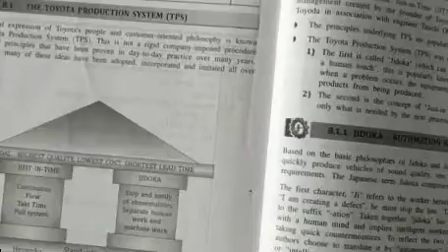Toyota Production System is based on two concepts. The first is Jidoka, and the second is JIT, that is, Just In Time.

Now, what is Jidoka? The Jidoka model or Jidoka concept is always described in one line: automation with a human touch.

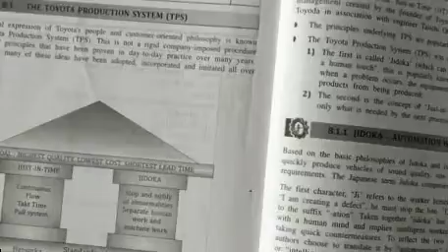When a problem occurs within the system, all the equipment stops immediately, preventing the defective product from being produced. So, when a problem occurs, all equipment stops automatically and immediately, which prevents defective products from being produced. That is the concept of Jidoka.

Now, Just In Time, the second concept, JIT. So each process produces only what is needed by the next process. This is JIT - each process produces only the material actually needed by the next process. That is Just In Time production, JIT production.

According to Toyota, this is automation with a human mind, and it implies intelligent workers and machines that identify errors and take quick countermeasures. That is the usefulness of Jidoka and JIT.

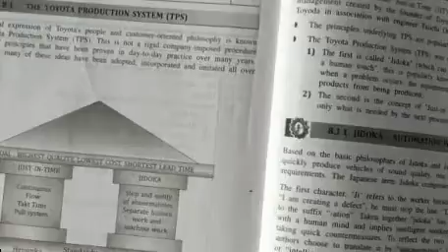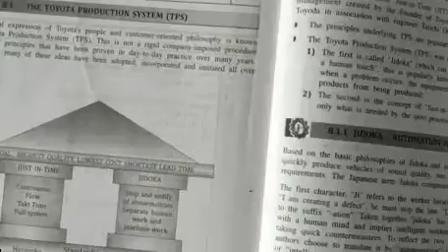So if we talk about the usefulness of Jidoka or JIT, according to Toyota, it is automation with a human mind. This implies intelligent workers and machines that identify any type of error and take the necessary countermeasures immediately. That is the usefulness of Jidoka and JIT.

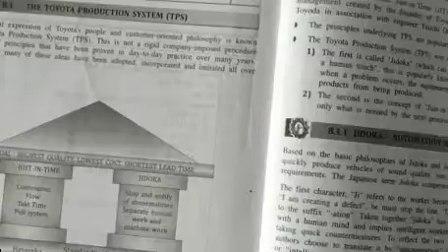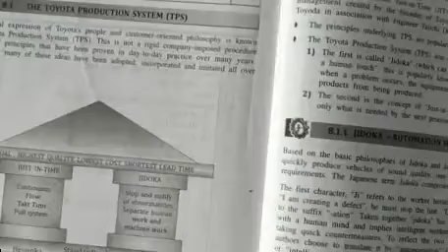Now, Just In Time actually replaces the conventional push system with a pull system. So JIT replaces the conventional push system with a pull system.

Now what is a push system? In a push system, production is pushed through in batches. For example, the supply of raw material goes to casting, then to machining, then to assembly works. After assembling, it goes to testing, and after testing, the final product is ready to deliver to customers. This process is generally known as the push system.

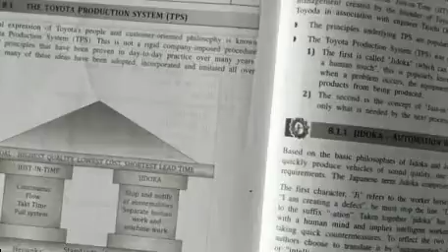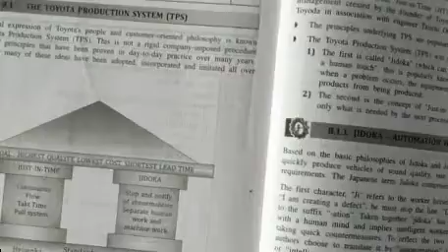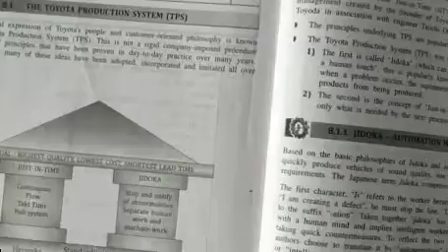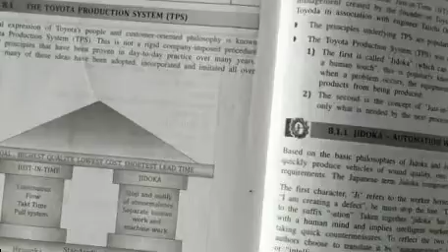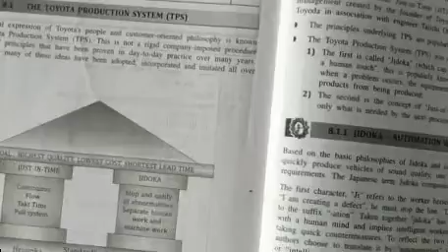In a push system, production is pushed through in batches. So what is the actual difference? A push system first makes the product and then finds a customer for it. A pull system is the reverse - it creates a customer first and then makes the material. That is the difference between the push system and pull system.

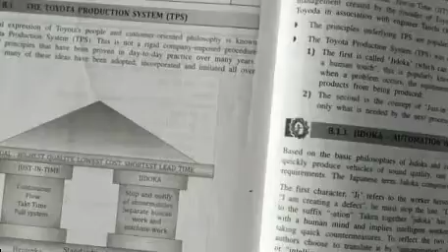Now, a push system makes all that it can, while a pull system makes what is needed, when it is needed, and in the amount needed.

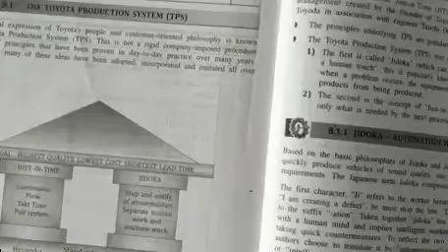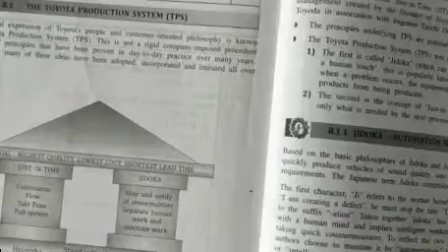Now pull systems always have the power to clear a number of wastages and difficulties, which are cleared by a pull system. So pull system clears a number of wastages or difficulties. Okay, so what are those?

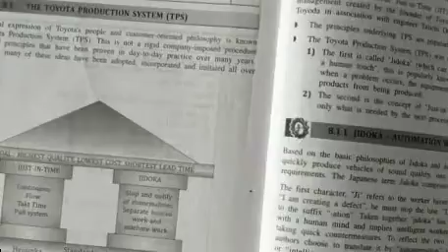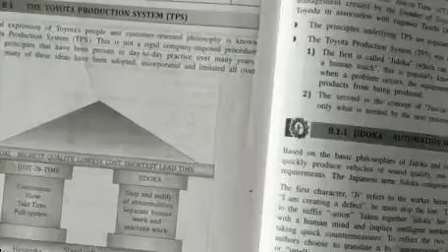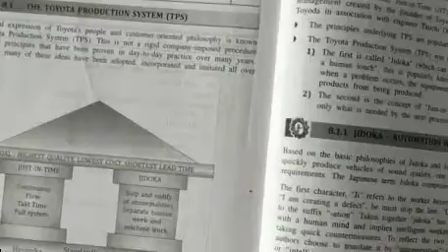Actually, the actual usage of all resources is the pull system. Achieving the production precision, the second point. Third is the low inventories at different stages. Fourthly, it is processing of small lots at a time. Then the fifth, significant reduction in wastage. And sixth, there is better communication among the functionaries, among all functionaries.

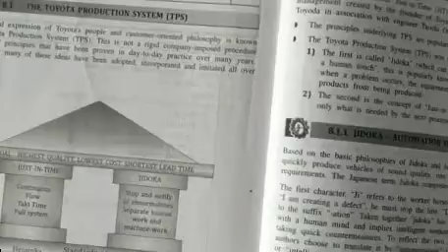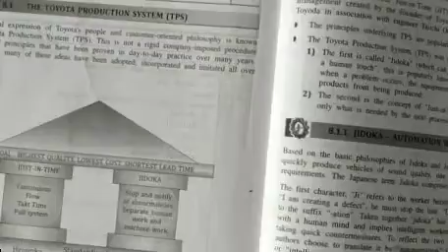So firstly, actual usage of all resources, which is very important - that is the full utilization of all resources. It is important. Secondly, there is achieving the production precision, which is also important, because if there is any problem with the design, if there is any problem with the pattern, if there is any problem with the quality of the product, then that will halt.

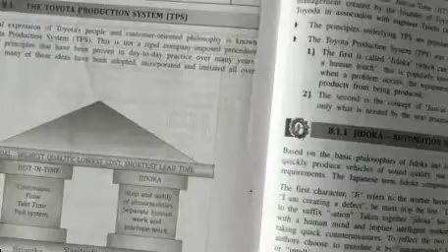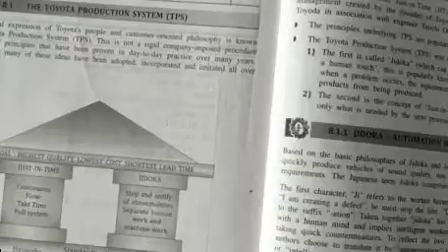Okay, so production precision means all these things are at their equal mark - that is the production precision. And low inventory means low inventory at different stages. It is a character of the pull system. Low inventory means everyone has to invest low in the inventory, and grossly if all the inventory is low, then there will be low investment on the raw materials and other tools, equipments, etc. So there is low inventory at different stages. It is also a point.

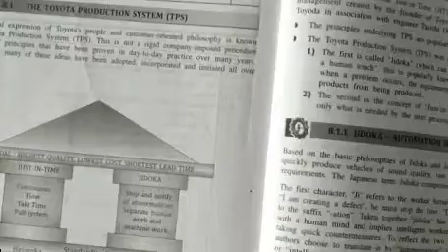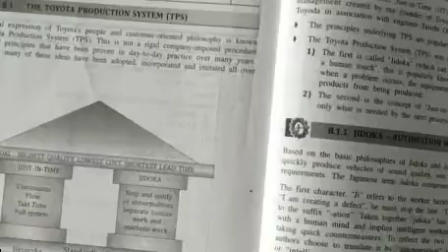Then processing of small lots at a time - when anyone can process a small lot at a time. And wastage, it is important in case of pull system. If you go through pull system, it has the power for significant reduction in the level of wastage. So wastage reduction means it is a cost saving, highly cost saving method to reduce your wastage.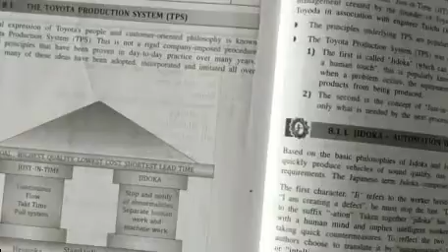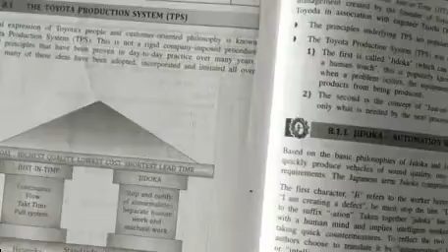Okay, and obviously you need a full-fledged system, so better communication is marked as a good characteristic in the pull system - that is better communication among all the functionaries who are involved in that production process or involved within the organization.

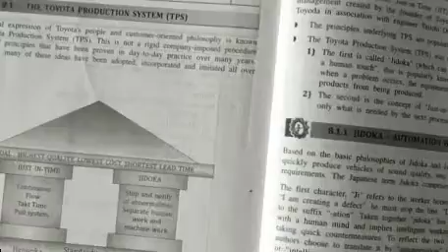Okay, now in the second procedure, now if we come to the second one, before we take another, we just get a term. There is a term normally used by Toyota Production System, TPS.

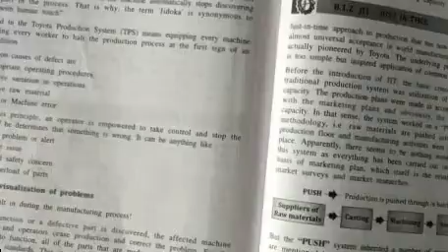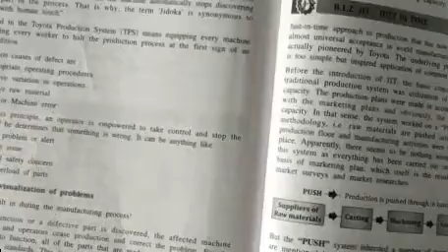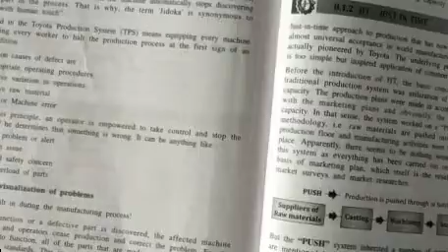This means actually equipping every machine and empowering every worker to halt the production process at the first sign of an abnormal condition. It is basically the main character of the TPS, the Toyota Production System - equipping every machine and empowering every worker to halt the production process at the first sign of an abnormal condition. Whenever it is abnormal, all the process will be stopped.

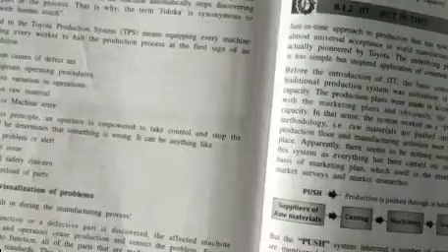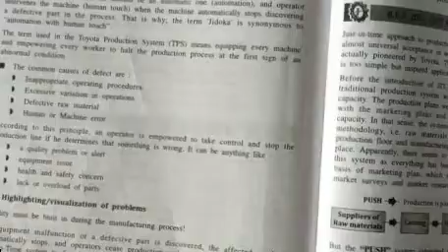Now, what are the common causes of defects? So when we are taking the common causes of defects, there is inappropriate operating procedures - that may be a major reason. There is excessive variation in the operation, that is also a major reason. Or there is any defect within the raw material, that is defective raw material, that is also a point. Or human error or machine error, that is also a point - there may be a human error, there may be a machine error.

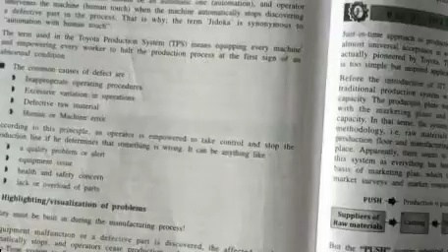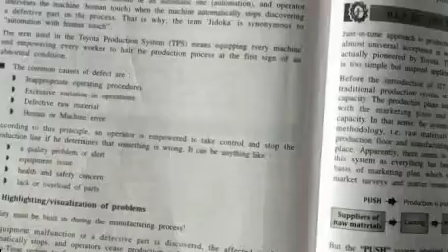Okay, so according to this principle, an operator is empowered to take control and stop the production line totally if he determines that something is going wrong. It can be anything like a quality problem or a quality alert, there may be an equipment issue, health and safety concern - there is also an issue - and lack or overload of any parts, that is also a problem within.

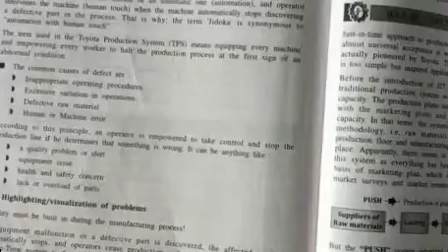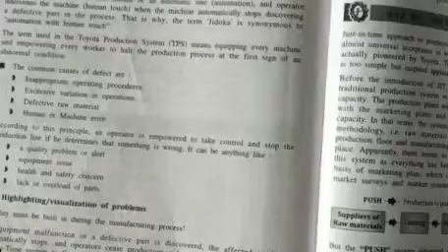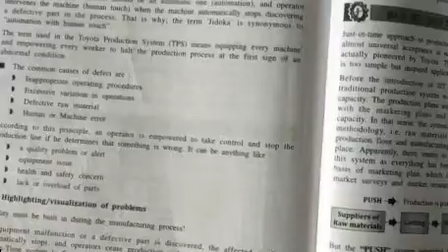Now come to the second process, which is known as Kanban. Kan means a card, and ban means a signal, so Kanban means a card signal. It is a signaling system employed in production management, which uses cards as a media for signaling or communicating messages.

We are talking about a pull system. So Kanban is a pull system.

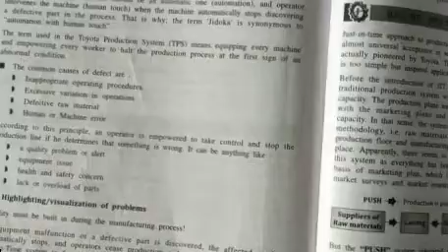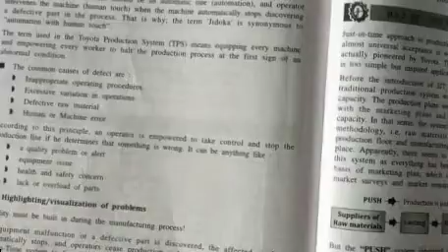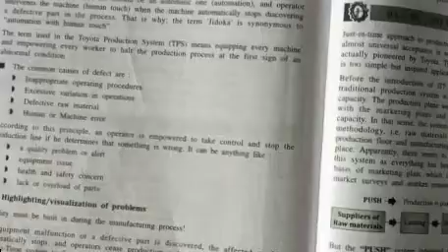If you see a Kanban card, there are several things within it: part description, part number, quantity, supplier, name of the planner, order date, due date, card number, location - all these things are within a Kanban card. These are the rooms within a Kanban card which are to be filled.

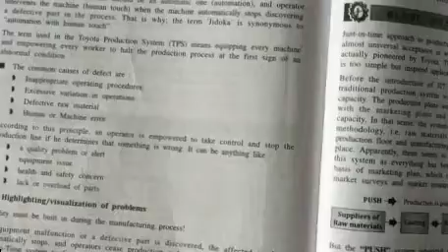Now the commonly available Kanban system is the 3-bin Kanban system. 3-bin Kanban means, just try to relate: first we have the initial demand point, that is the first point. The second pole is the inventory control point, and the third is the fresh supply of raw material.

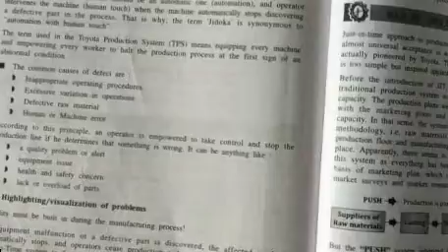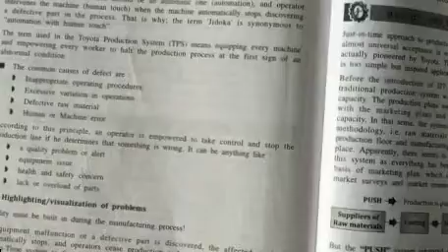These three things are interlinked or internally connected. First is the initial demand point, second is the inventory control point, and the third is the fresh supply of material. These three empty points are related through a Kanban card.

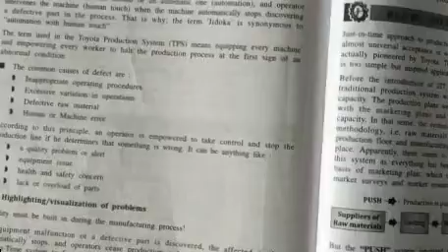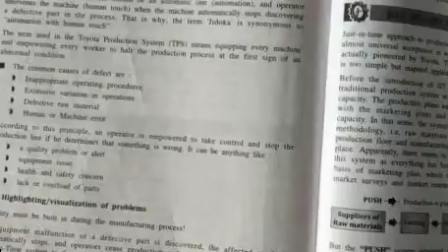There is a bin in the supplier premises. Similarly, there is a bin in the factory store, and there is a bin in the factory floor. So first there is a bin in the factory floor, secondly a bin in the factory store, and thirdly a bin in the supplier premises, from where the raw material or fresh supply of raw material comes.

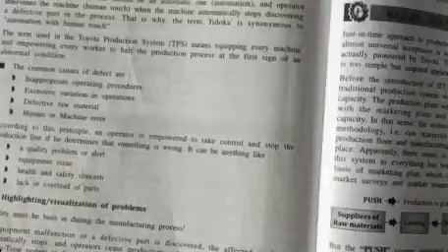These three bins are internally linked with a card, which is the Kanban process. So time to time, signal for the requirement of material we can get from the Kanban card. This pattern is what we call the 3-bin Kanban system.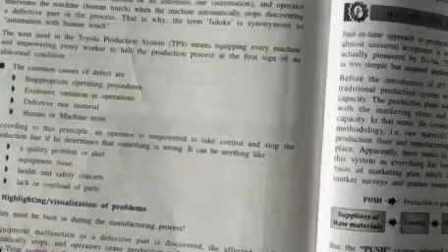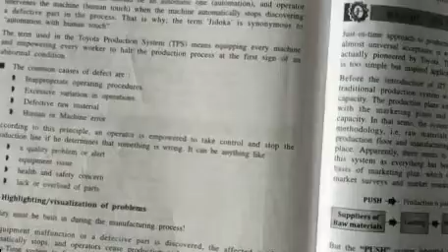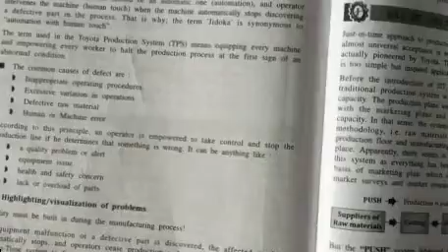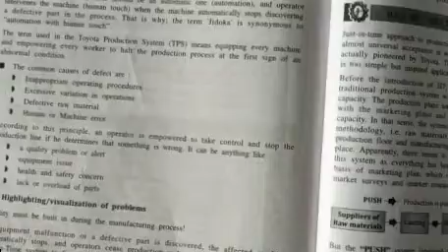It may be a printed card, or it may be a digitally updated software system which anyone can deal with in a production management system. So Kanban may be in a written version, or Kanban may be available in a digital version.

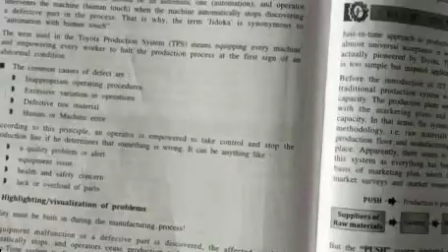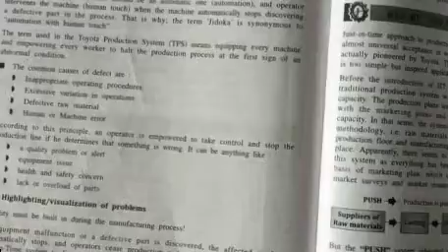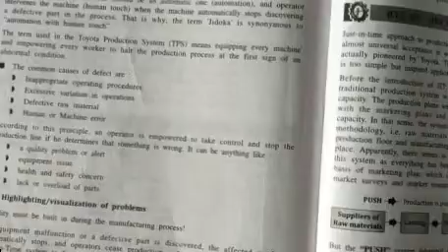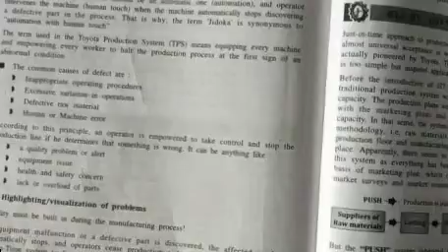It is a card. You can get an example of a similar type of card when you take a book - that's what a Kanban card is similar to. When you take a book from a library, every book contains a yellow type of card at the end of the book. When you issue the book, the librarian notes on that yellow card your name and date of issue of the book, and that card remains with the library.

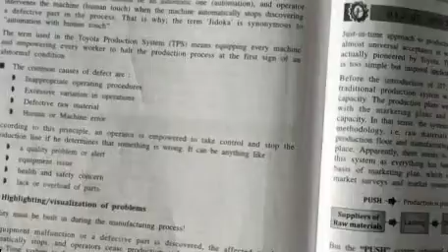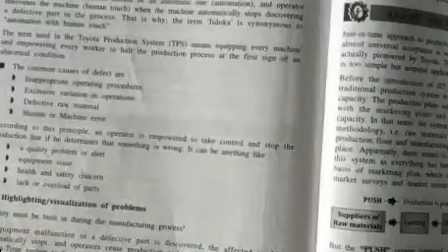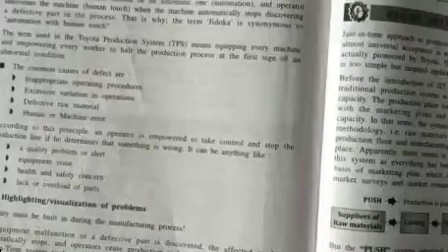Whenever you come back to the library to return books, the card is opened by the librarian, and your signature and the date of return are noted down on that yellow card. That yellow card is quite similar to the Kanban card. This digital yellow card is used for the library, and a similar type of system, Kanban, is used in the production system. So there is a similarity between the card with a book and the Kanban card within an industry or factory.

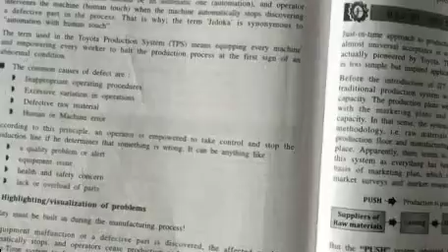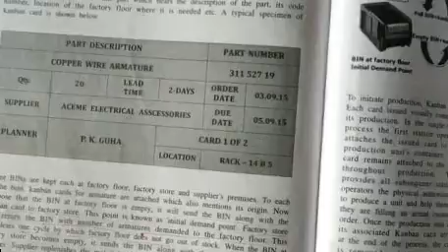Now when we talk about the Kanban process, first we should note that Kanban is a pull system. It pulls inventory as needed. If you consider the supply of a simple assembly system, take the Kanban card, and read through it, you can easily understand how it works.

Now we are talking about the 2-bin Kanban system. There is also a 3-bin Kanban system. Whenever Kanban movement between the factory floor and factory store is considered, it is a 2-bin system. But besides the 2-bin system, you can also use a 3-bin Kanban system.

Kanban cards are always issued to the first operator in a process. Each card issued carries a visual that communicates important details about the order and authorizes its production. In a single stage process, the first station operator attaches the issued card to the production unit container. The card remains attached to the unit throughout the production time. This provides all subsequent station operators the physical authorization to produce a unit and helps them know they are filling an actual customer order.

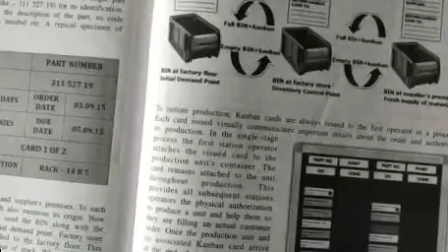There is an advantage when any production system uses a pull type of production. Remember that Kanban is always a pull system. It is also worth reminding that a pull system is always an advantage over a push system. Basically, it is a digital store of the details of the present production status or scenario.

This is all about Kanban and TPS, the Toyota Production System. In the next class, we will take up TQM, total quality management, and the story of Japanese success. So TQM and Japanese success will be our next topic.